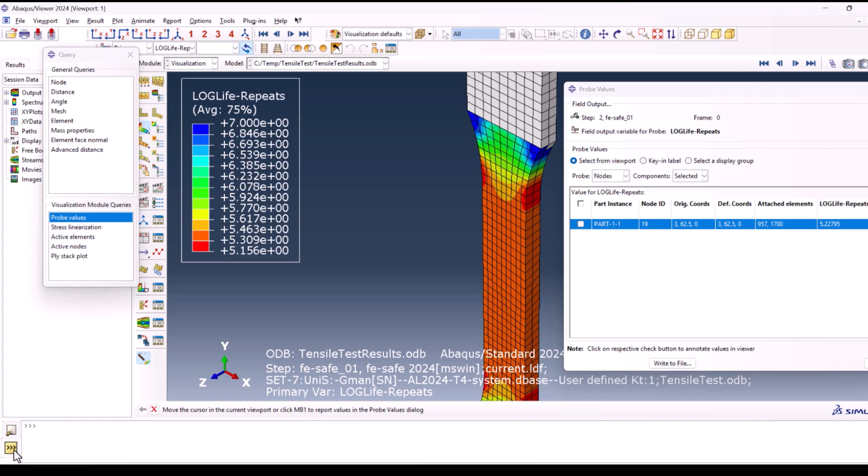What if you could predict fatigue life using just one simple mechanical test? In this video, I'll show you how to estimate fatigue life by combining Abaqus and FE-Safe using nothing more than a tensile test sample. I'll walk you through the full workflow from running the simulation in Abaqus to importing the results into FE-Safe and predicting fatigue life step by step. No unnecessary theory, no extra testing, just a practical method that actually works.

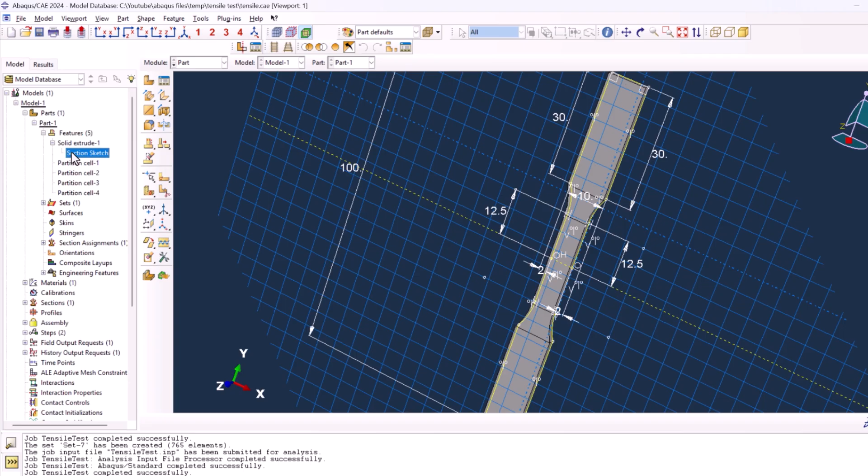Let's get started. Now you learned how to create a model and perform fatigue analysis in stress-based mode. Let's solve more examples with different materials, different loadings to have a better understanding of this topic. Today I chose a tensile test sample. This is created based on the ASTM E8 standard, and as you see here, this is the section, 100 millimeters in length, while the gauge length is 25 millimeters.

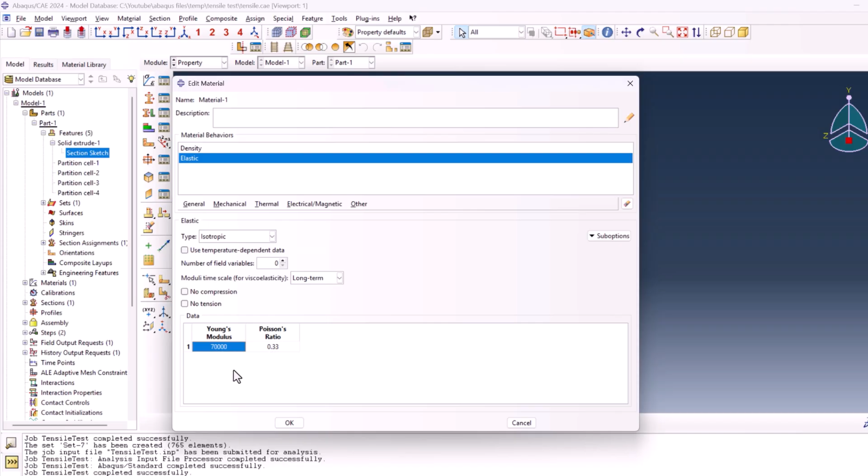This time, unlike the previous examples, we have different materials. So the material today is aluminum alloy. This is the density, 2.7E-9, while it was 7.8 for the steel, and the elastic modulus is 70,000, while in the steel it was 210,000. The Poisson's ratio is the same. Okay, let's go and check other parts. The step is a static general 1, and these are the details.

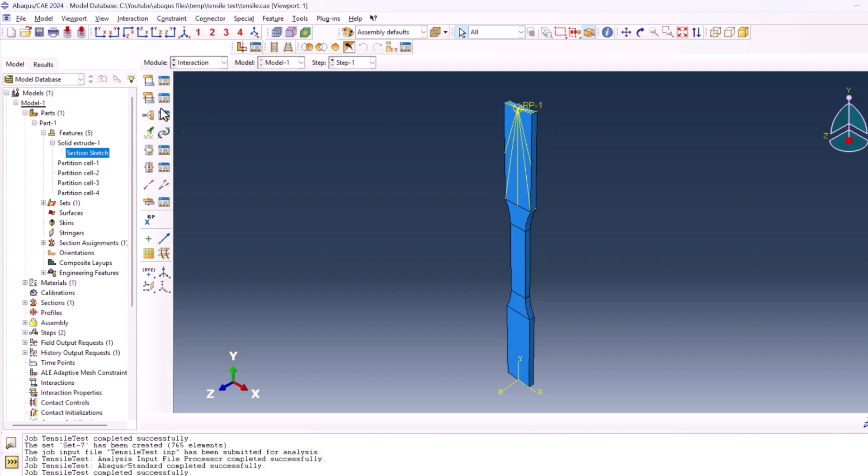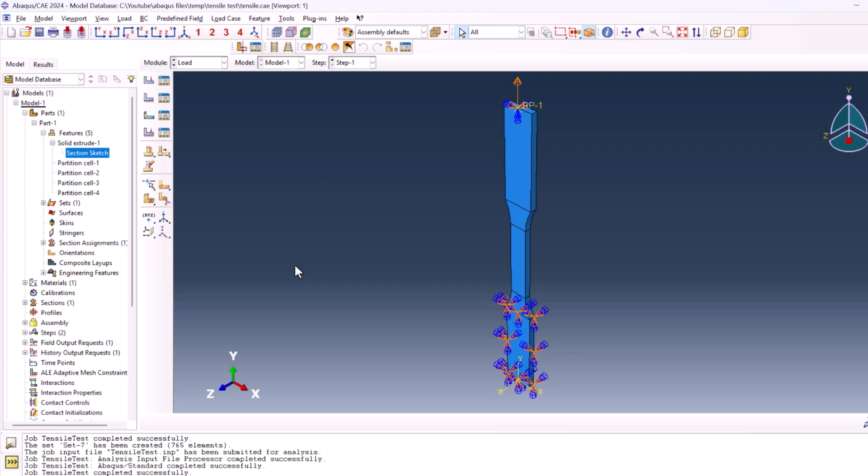If we go to the interaction, we have a reference point here, and it is coupled to this region. And if we go to the load, the first loading condition we have is to fully fix this part and let this part only displace 0.1 millimeter in the Y direction. We don't need the amplitude here because we're going to apply the amplitude in the software. And let's go to see the mesh.

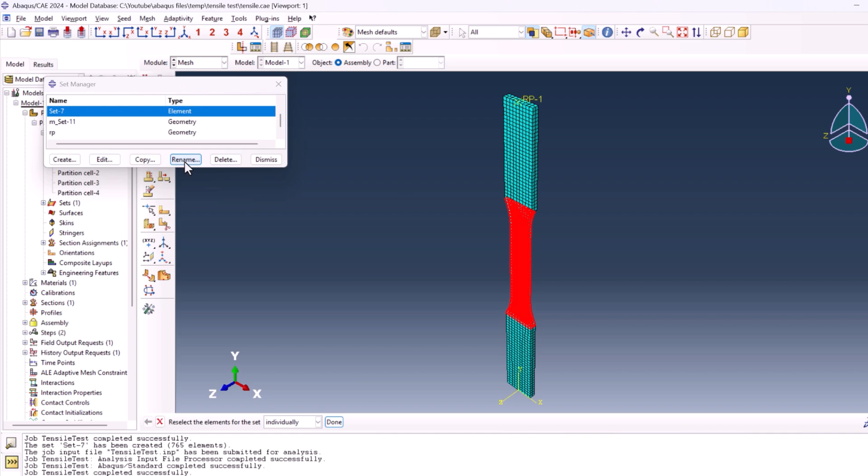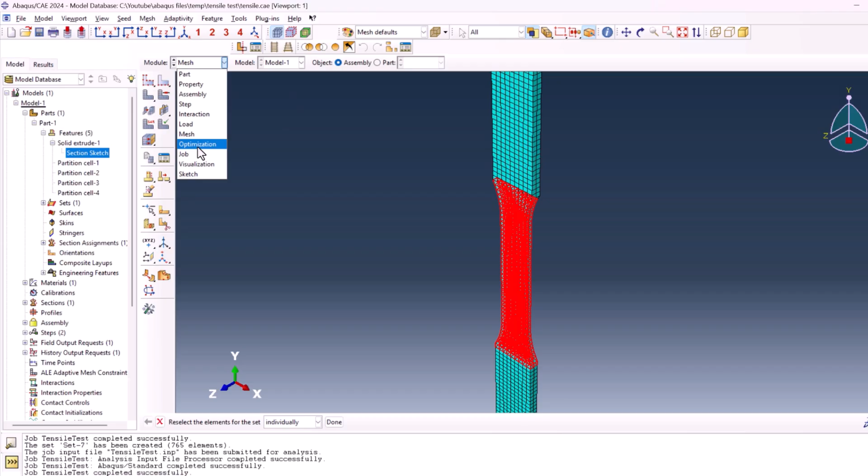This is the mesh we have, but this time instead of a full analysis, we know that we only have the stress in this region. So I created a set number 7. Let's rename it to gauge length. Okay, we have this one here. We're going to perform the analysis only in this region. I'll tell you why. So let's go to look at the job.

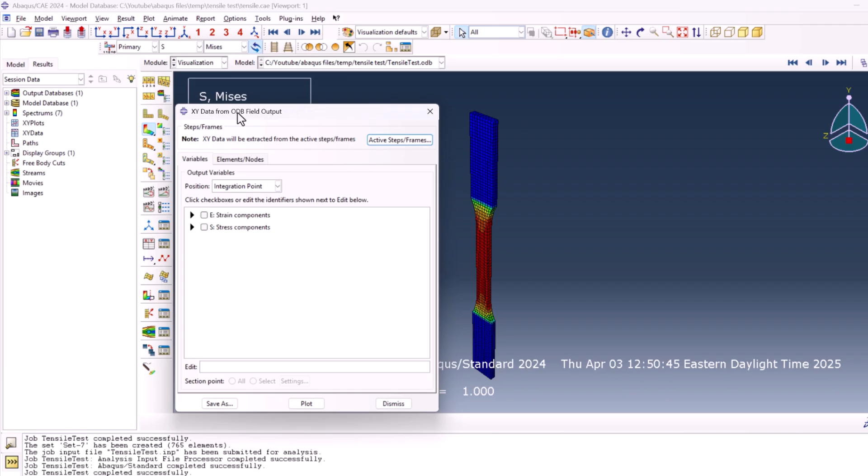Here, as you see, we only have the stress here. So if we want to include this part, we're going to increase the cost of the analysis just for nothing, as we know we have all the stress here. Okay, let's plot the force versus displacement from ODB field output. We continue. This is why we have the reference point here, reaction force 2, RF2 and U2. And here from node set we can have the reference point, and if we plot that, it's easier for us.

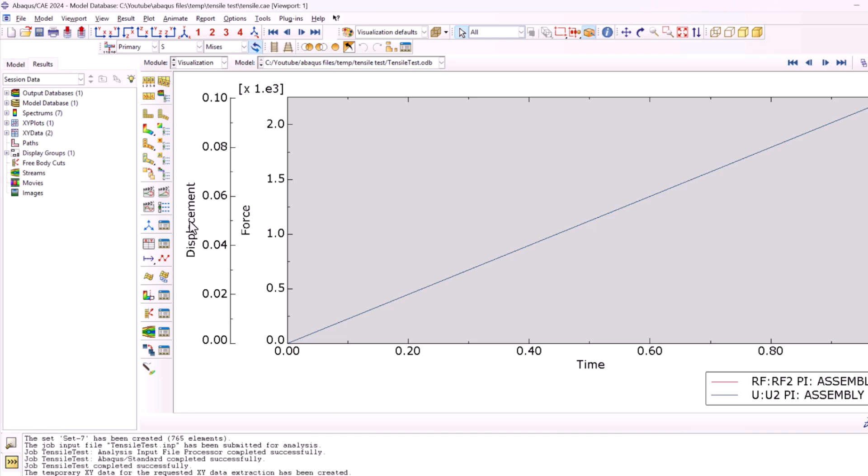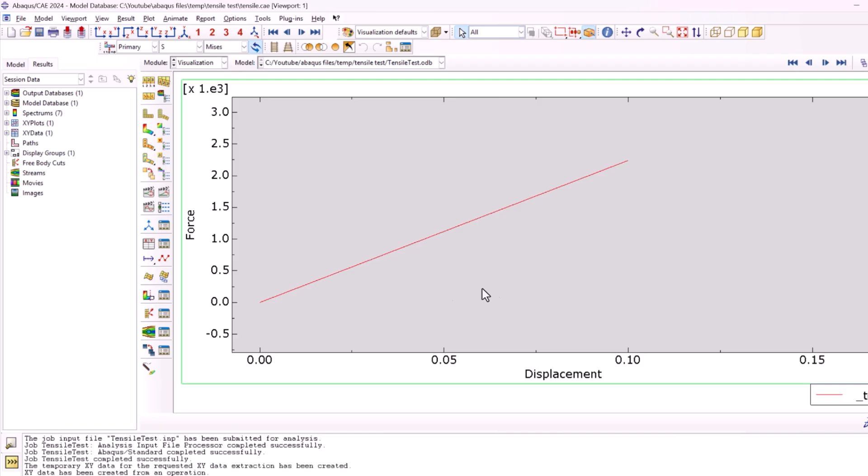And if we go to the XY data once more, operate on XY data, continue, we have combine here, double click on U2 and RF2, and if we plot that, you see here we have the force versus displacement, and as you see it's linear. We are in the elastic region. We don't want to go to the plastic region. You might think it's in the plastic region, but it didn't surpass that much, so we're kind of in the elastic and plastic region, which is called the elastoplastic region.

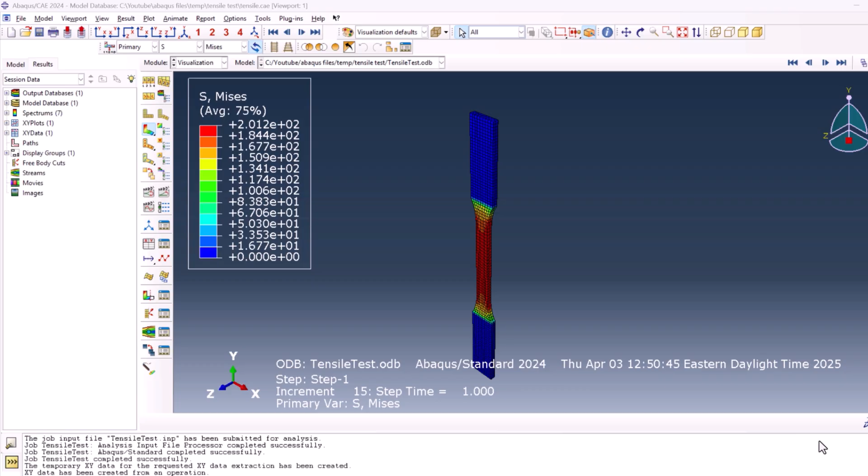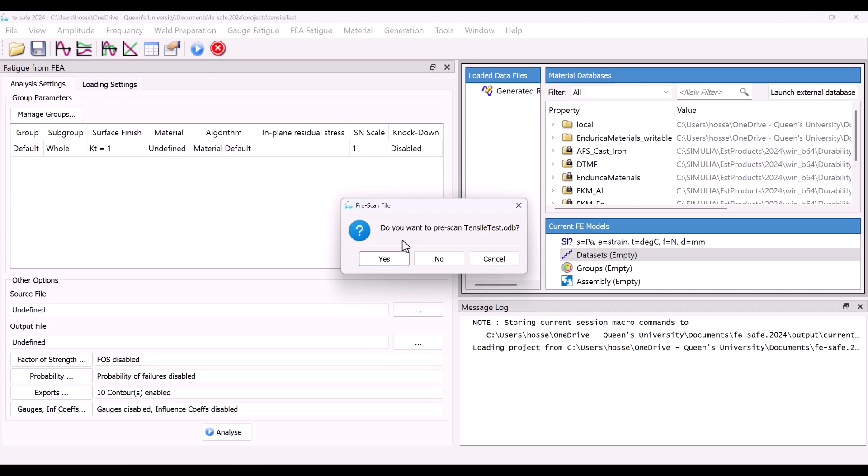So now it's time to go to FE-Safe to see the model. Okay, now we open FE-Safe. Let's rename this one as tensile test and create. Okay, let's open the finite element model. Now I have to find the model. Here is the tensile test. Let's open it. Yes. We don't want temperature, we don't want initial orientation and others.

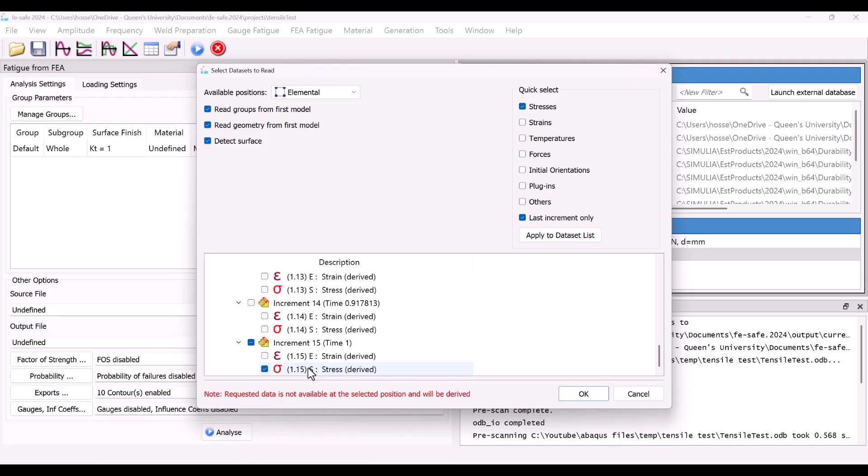We only want stress in the last increment. And if we hit OK, because by default it selected other things, it asks us to make the changes. As you see, we only have the stress here. Hit the OK button. This should be megapascal, strain, degree centigrade, Newton, and millimeter. OK. Yes. Now we only need the gauge length. So this is set 7.

I forgot to submit the job after. Doesn't matter. So we set everything to this side. As you see, we have 1800 elements in the model, but in set 7 we only have 700 elements, so it's more efficient, especially when it comes to complex models.

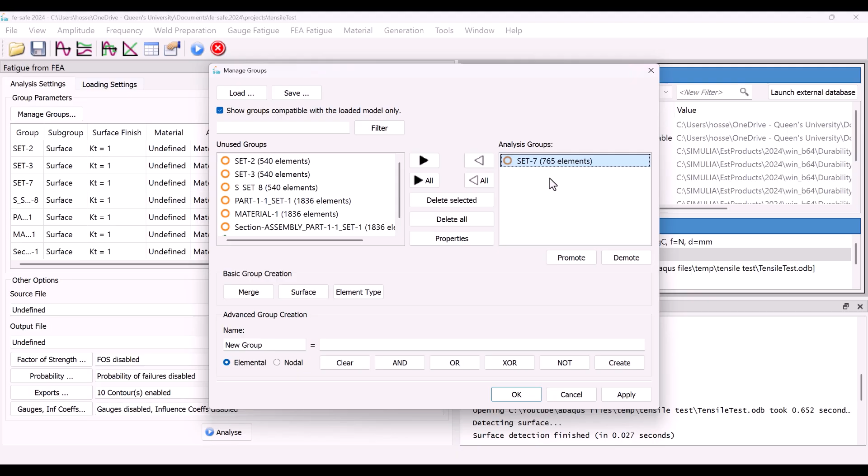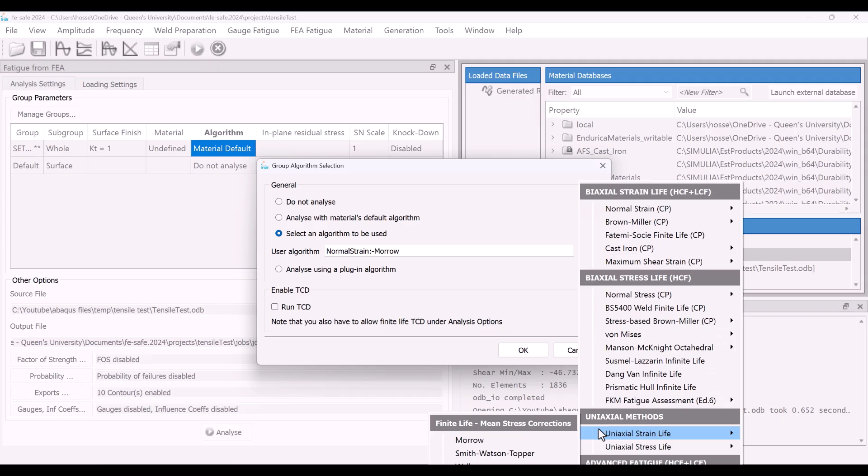Now we need to hit edit, do not analyze, and double click on this one, whole group. The algorithm must be... let's select uniaxial stress. We can have Goodman, and OK.

Now we have to find the aluminum alloy from the system. Here we have, let's say, this one, aluminum 2024 T4. The constant amplitude is this, the elastic modulus is kind of the same. Let's find another one - the elastic modulus is higher, this one is a little lower, this guy is also a little lower. Let's stick to the first one, which is nearly the same, and the Poisson's ratio is also the same.

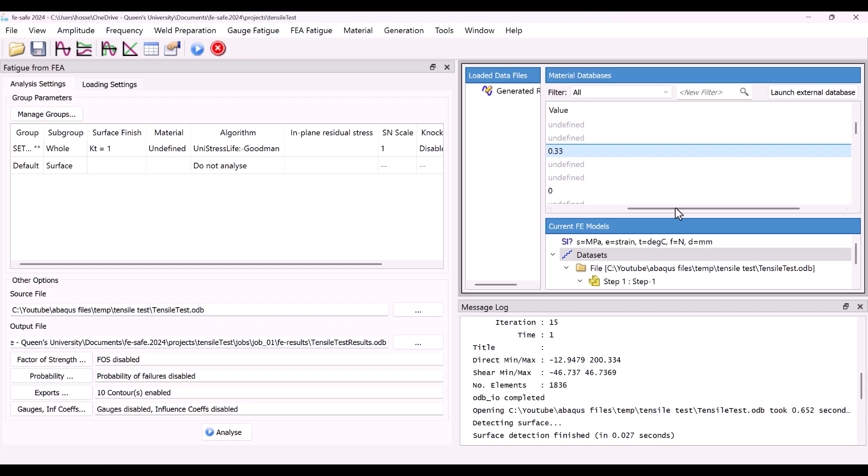So this one, double click, and yes, now we have the materials assigned. But in the loading setting, this time, first I want to clear all the loadings. Instead of creating the signal generation here, I want to add a user-defined load dataset. So if I go here and select this one and add a user-defined load set and click OK...

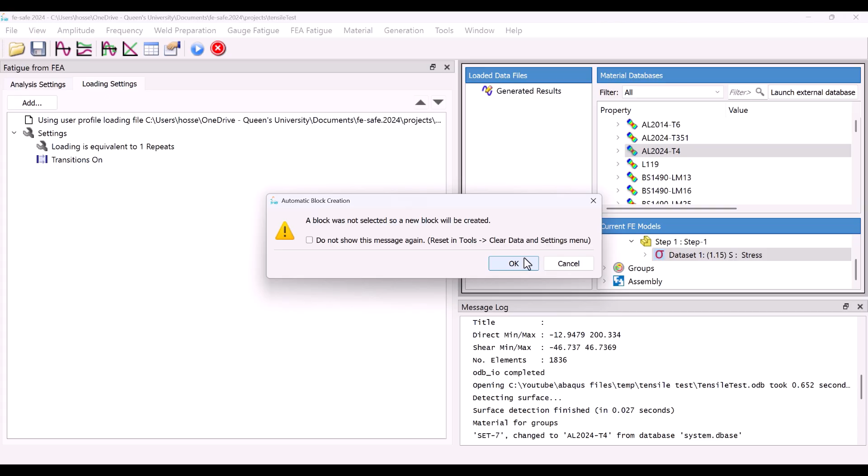Here I can use the load scaling, for instance 1 and -1. It means we have a fully reversed load. Let's hit the OK button, and we're good to do the analysis.

Continue, and as you see here, we have 140,000 for this one. Let's check if we clear this loading and generate a signal wave here.

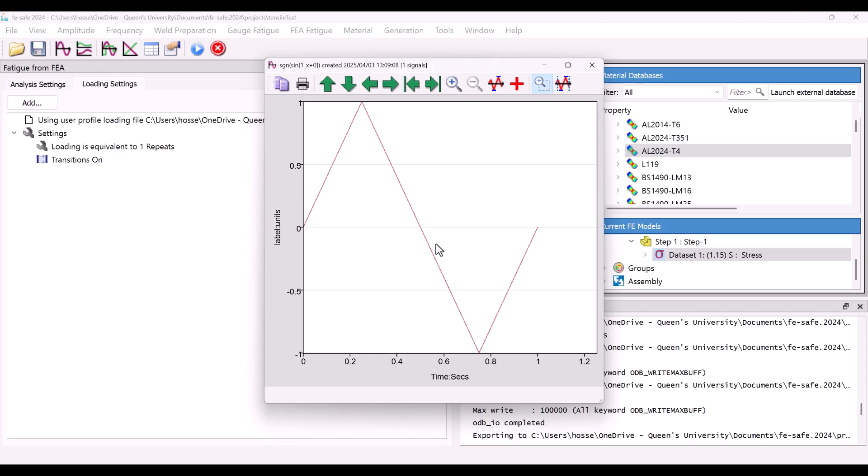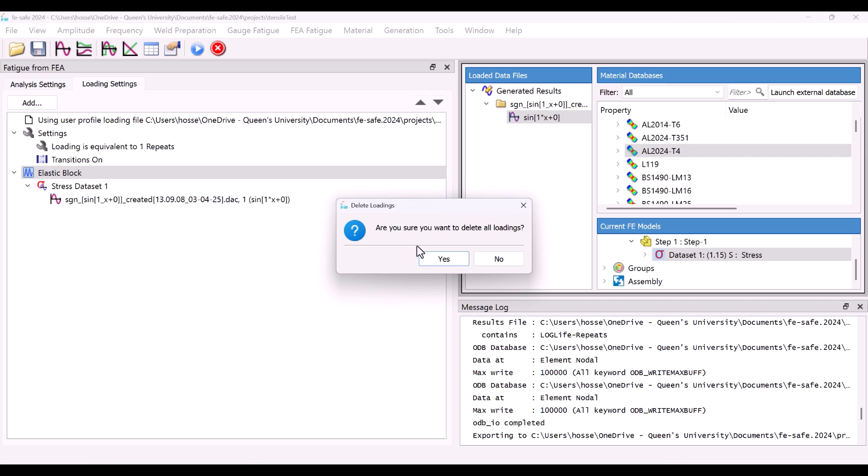If we select this one, add load dataset, and OK, let's do the analysis once more and see if we get the same number or not. Yeah, as you see, we got the same number. So this method is way easier - just clear everything at first, then add a user-defined load dataset.

So I click on OK. Here, now we can have the loading we wanted, 1 and -1. I want to hold this here, and let's go and see the job first. I want to change the output to a different place, such as temp.

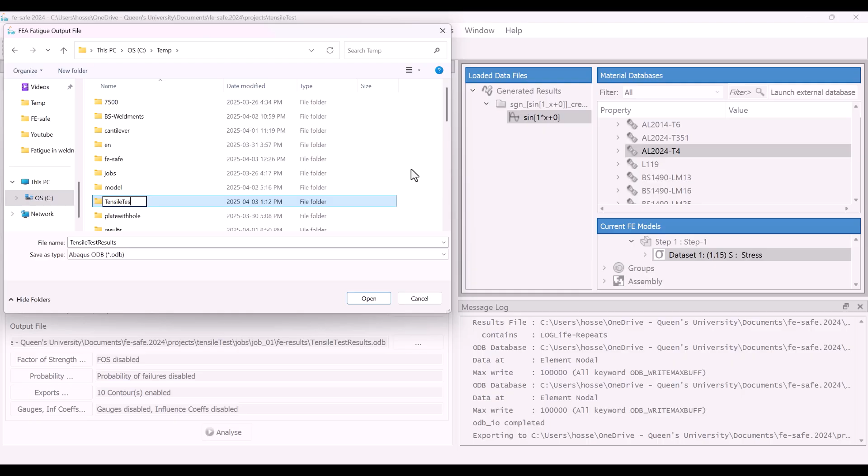I can create a new folder here, and tensile test - results can be here. I want to analyze this job once more. Continue and open the result folder. Here I can see the results. This is the results, OK, open it.

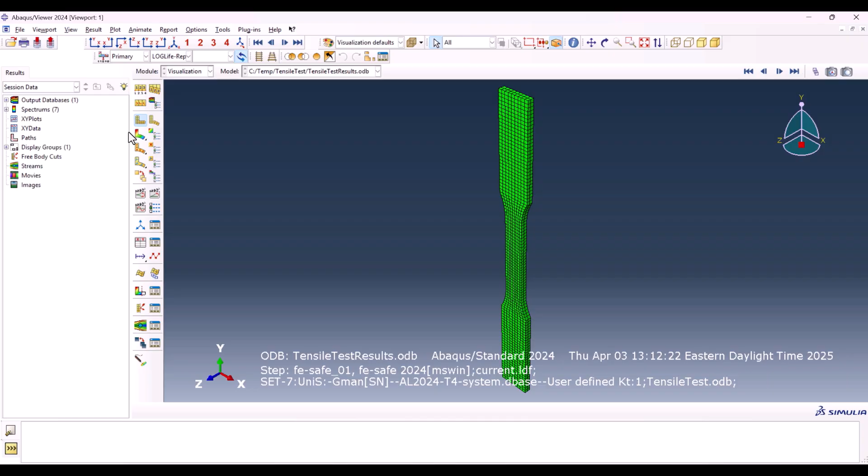As you see here, we don't have any colorful contour. It means it's not in the analysis, and we only have this part. Let's unify that with Abaqus. So if we go to the spectrum and reverse the rainbow and click OK...

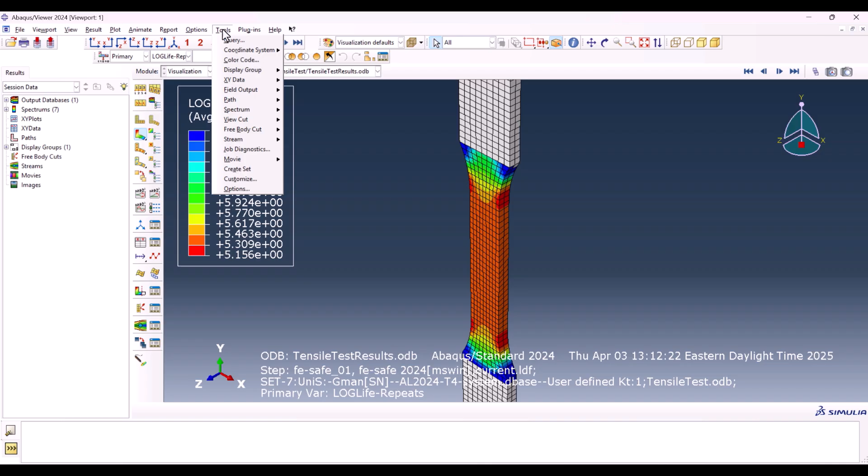You see here in this part we have the lowest life, and it is 5.15. To extract that more accurately, we have to go to tools, and query and probe values. I can put this on nodes, and for instance we can have it somewhere around here. It shows the value.

Now in this kernel I can have 10 to the power of 5.22795, and it gives me 169,000 for this node. But we have different nodes here.

For instance, here is 5.16. It means it's more critical. So 10 to the power of 5.1655, and it's 145,000.

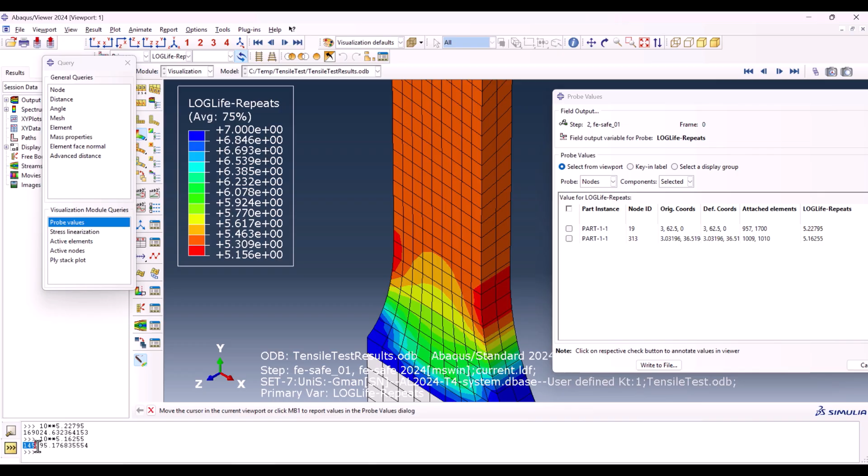So using the probe values, you can use wherever you want and analyze it more carefully. Okay, now let's go and see what would happen if we change the load.

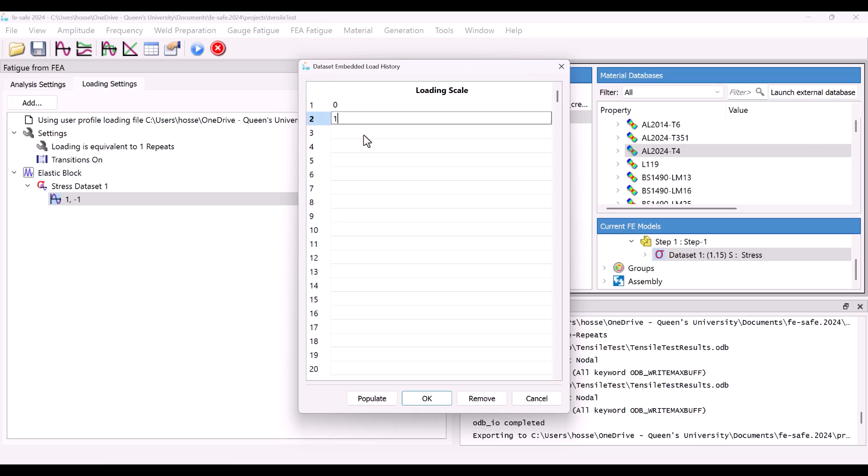So this is 1 and -1, and if I put this one on 0 and 1 and hit OK - so in this one I said Goodman, 0,1 for instance - and I can do the analysis.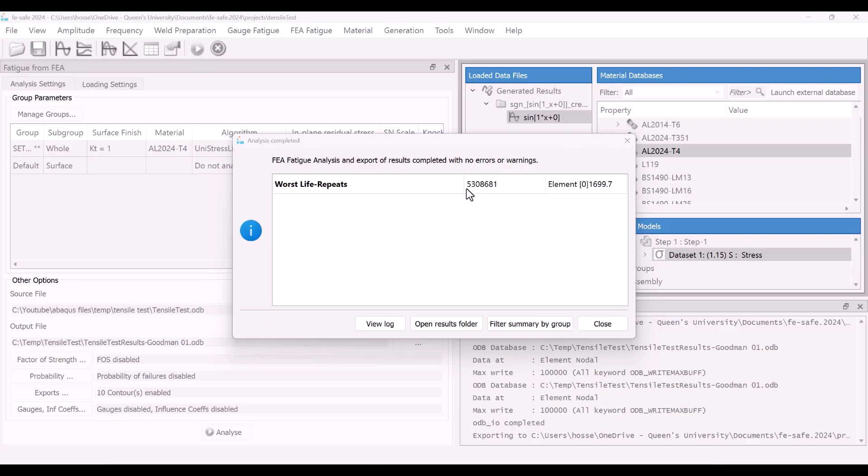Continue, and as you see the life increased to 5 million cycles. Let's see the results here. So we have the Goodman, tensile Goodman ODB file.

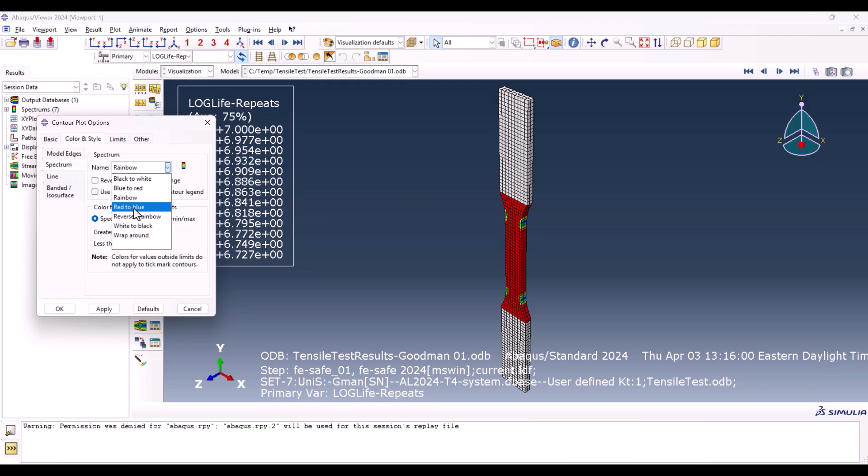Let's see the spectrum and reversed rainbow. And as you see, the contour is different. It means the loading does really matter, because in the fully reversed load we have tension and compression all the time, but in this one we only have tension.

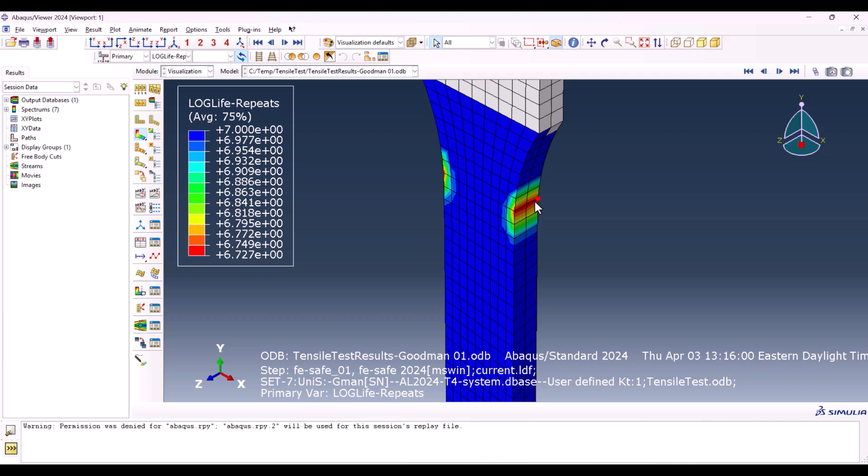So by changing a loading condition, you can increase the life of the component. Here you see only in this part we have the lowest life, which is 10 to the power of 6, like 5 million, and by excluding this part we could run the simulation faster. You might not see that much difference, but if the component is complex you would see a huge reduction in time.